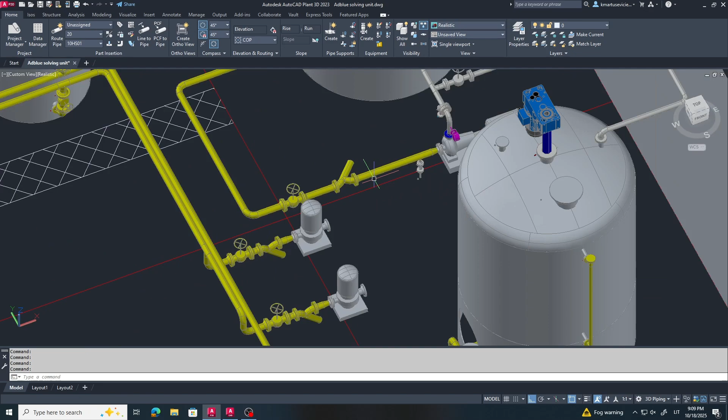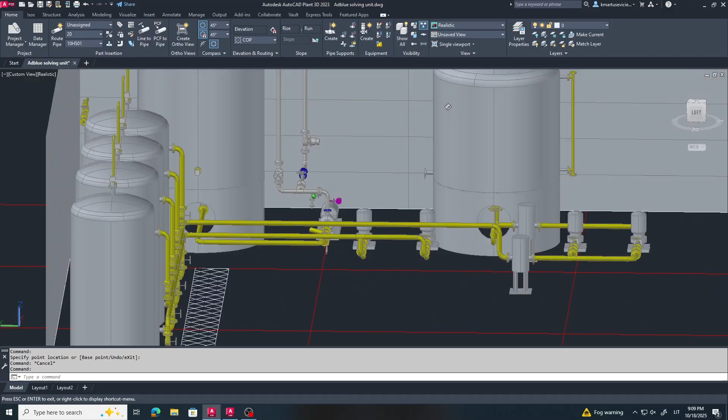In these videos, I walk you through how each part of the installation works, from tanks, pumps, and piping layouts, to instrumentation, safety requirements, and overall process logic. My goal is to make the whole system easy to understand, even if you're not deeply familiar with industrial design. Step by step, we'll build the full model, explain why every component is needed, and show how everything connects in a real production setup. Let's begin.

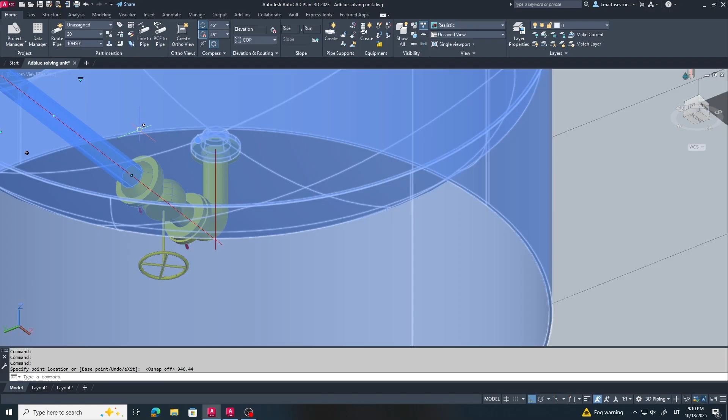Here I'm adjusting the water tank pipeline to create a clear and safe maintenance area. The goal is to organize the lines so technicians have enough space to access valves, instruments, and the tank itself without obstacles.

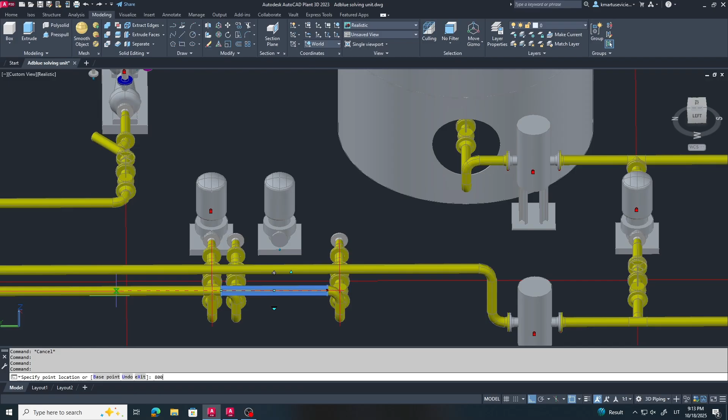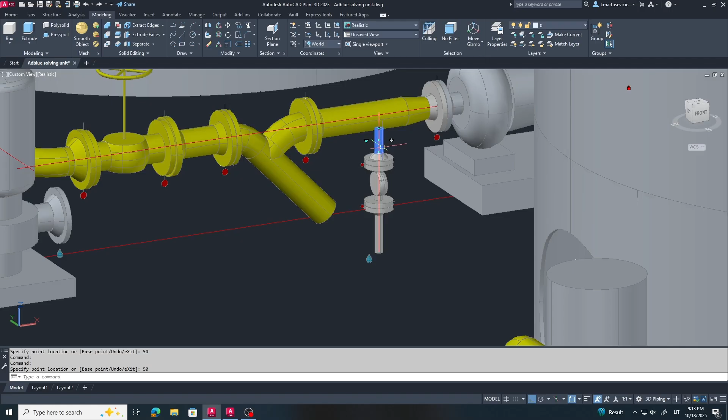Just a small jump to another line. The strainer outlet should be oriented downward, so debris can settle properly in the basket-type filter. Another issue is that the strainer end is positioned too close to the drain valve. The opening at the end may block access, making it difficult to operate the valve. So we need to adjust its position for proper clearance.

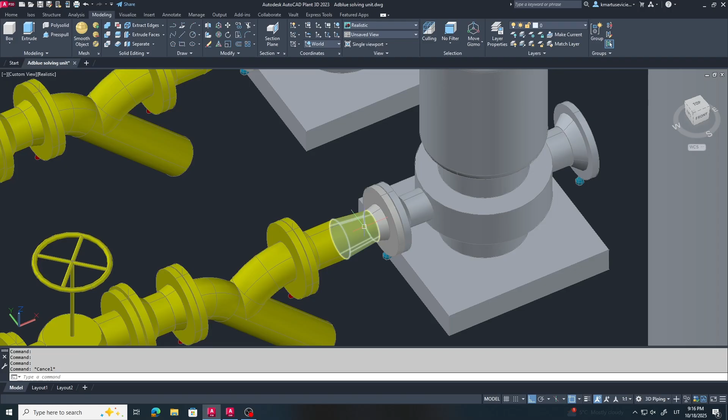I'm shifting the pump slightly backward to create better spacing and improve overall accessibility. Here I'm adding the drainage valves to complete the line and ensure proper emptying during maintenance or shutdown.

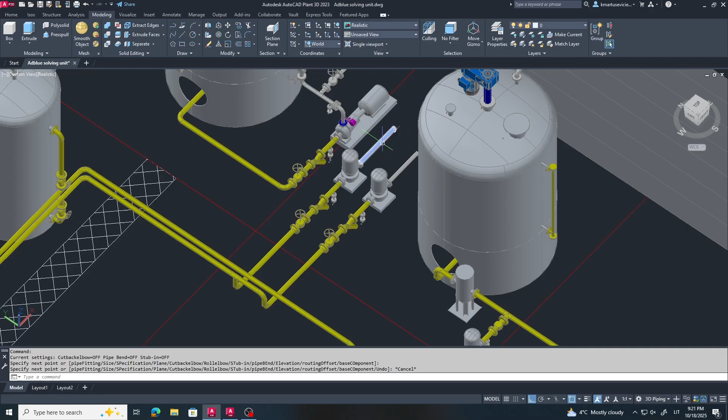Let's finish the discharge lines. One pump feeds the truck loading unit outside, and the other pump fills the storage tank using hoses. Both lines can operate at the same time, so the pumps work independently from each other.

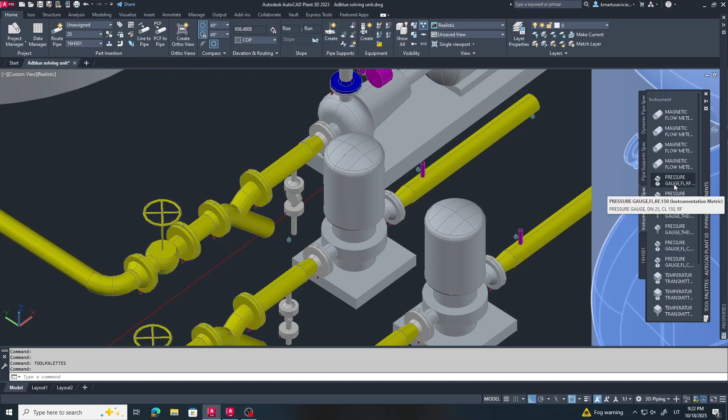Now I'm adding a pressure gauge on the discharge line. This instrument lets us monitor the pump's operating pressure in real time. It helps detect blockages, abnormal resistance in the line, or any pump performance issues. During maintenance or startup, the manometer also shows whether the system is properly primed and running within the safe pressure range.

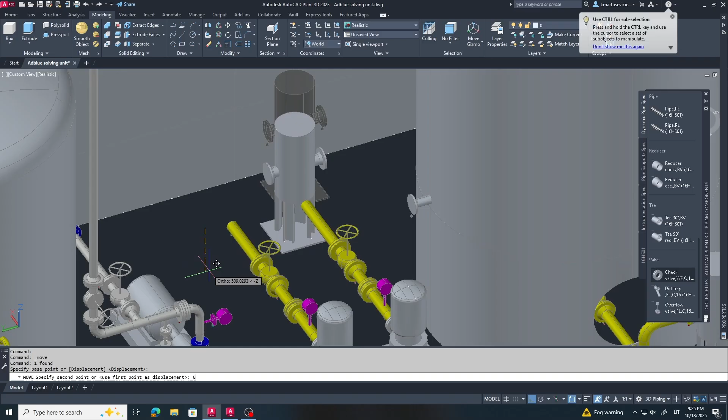The discharge pumps also need basket filters to ensure they deliver clean product to the outside system. These filters trap debris and protect both the pumps and the downstream equipment, keeping the flow consistent and preventing blockages.

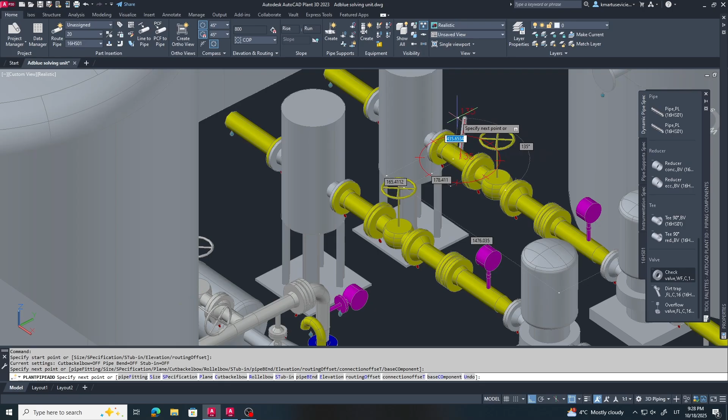Let's add pressure gauges on both sides of the filters. With pressure gauges on both sides of the filter, we can easily see how well it's performing. When the filter begins to clog, the pressure on the inlet side increases because the flow meets more resistance entering the filter. At the same time, the pressure on the outlet side decreases as less product can pass through. The growing difference between these two readings is a clear indication that the filter needs cleaning or replacement.

I connected the filters with a pipe so we can switch the pumps between truck loading and hose filling. This setup gives flexibility. Either pump can serve either line, depending on what operation we need at the moment.

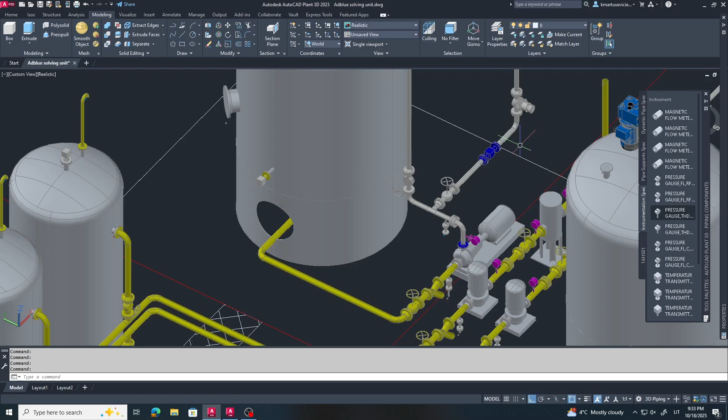Both lines need flow meters, so we can accurately track how much product is being transferred. On the truck loading line, the flow meter shows the exact amount delivered to the truck. On the hose filling line, it helps control and record the volume pumped into the storage tank or containers. Having flow meters on both lines ensures precise dosing, proper documentation, and easier monitoring of the whole system.

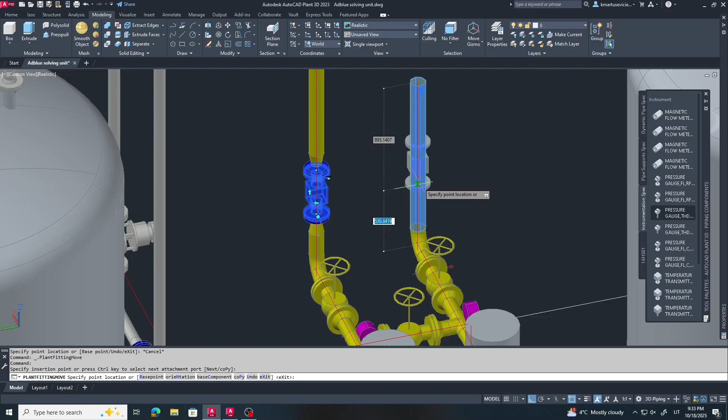Now let's add pressure gauges on this filter to monitor its performance more accurately. The same principle applies here as before. We place pressure gauges on both sides of the filter to see how its condition changes during operation.

This pump is not just a reserve unit. It also has its own dedicated line for pumping AdBlue from the drainage hole, the sump pit. So we just stretch a line from the elbow.

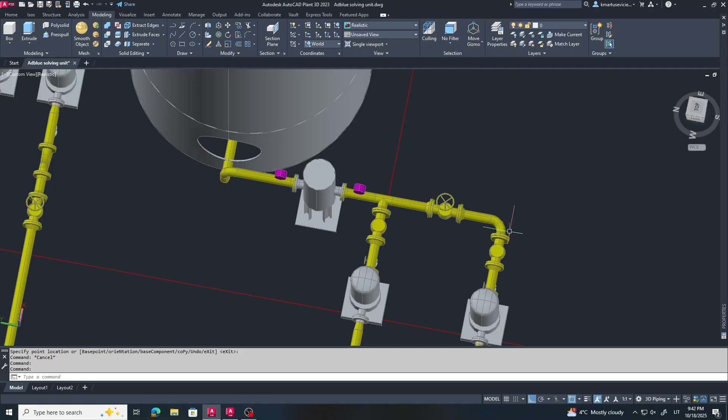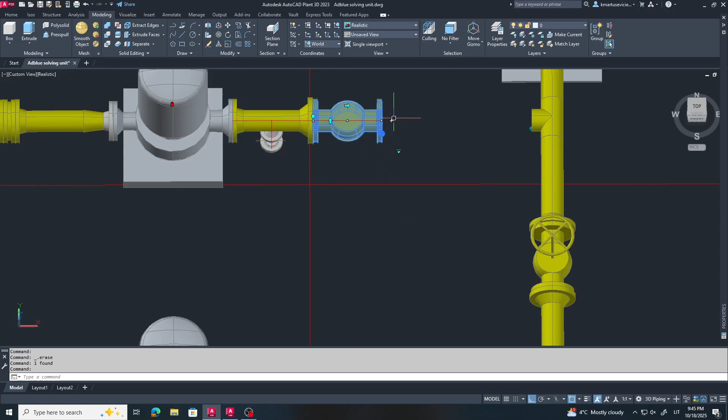I'm just moving this unit to the left side to create free space for the pressure gauges on the suction line. I'm also adding gauges to the pressure lines and secondary filter as well.

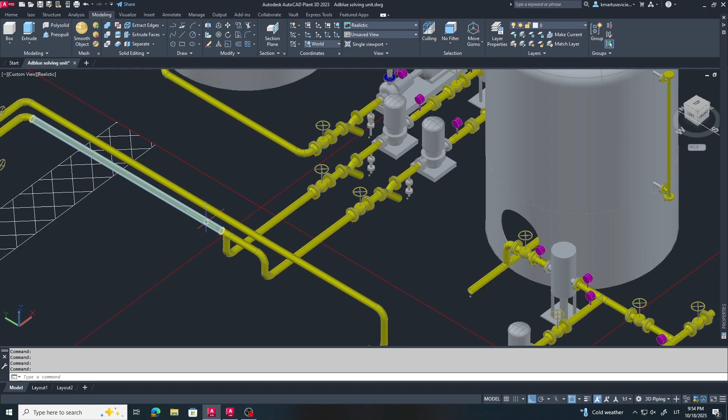I'm simply extending one line from the reactor outlet and connecting it to the discharge pumps. This allows us to take AdBlue directly from the reactor and pump it to the outside as needed. When this option is not needed, we simply shut the valve off.

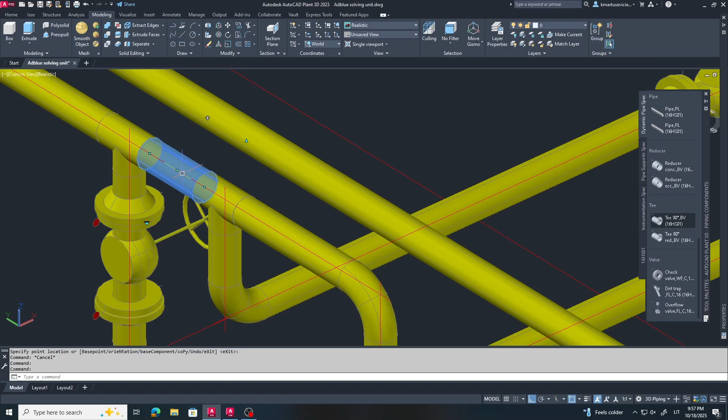I'm adding one more branch on the discharge pump inlet side, with the other end connected to the drainage pit line. This allows us to pump waste from the pit into a plastic container whenever it needs to be emptied.

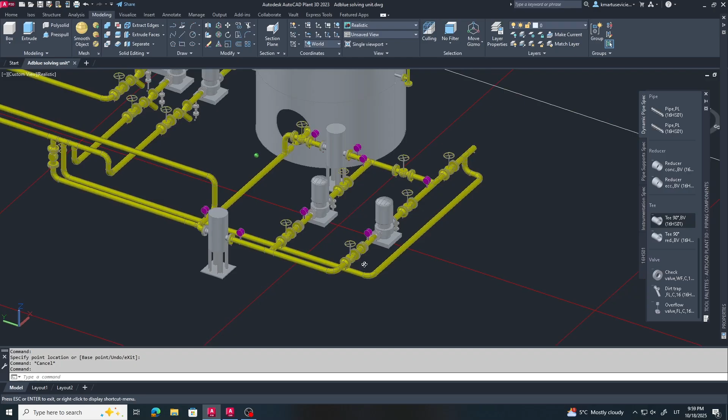This pipe path looks chaotic now, but we'll tidy it up later. This pipe routing looks like a disaster to me right now, but every project has to start somewhere. We improve it step by step until the whole unit becomes clean and efficient. By the end of this project, all pipes and equipment will be in better positions. It just takes observation, adjustments, and sometimes learning from small mistakes.

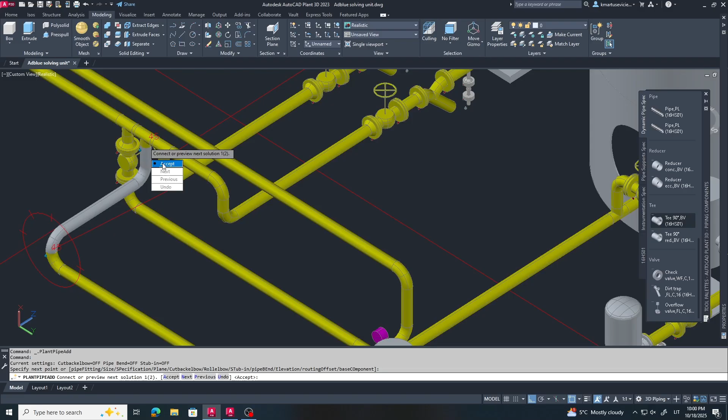It's very hard to complete a project without adjustments. You can place equipment where you think the positions are good, but later you often need to move it because the pipes are too close, access to nozzles is uncomfortable, or maintenance space is missing.

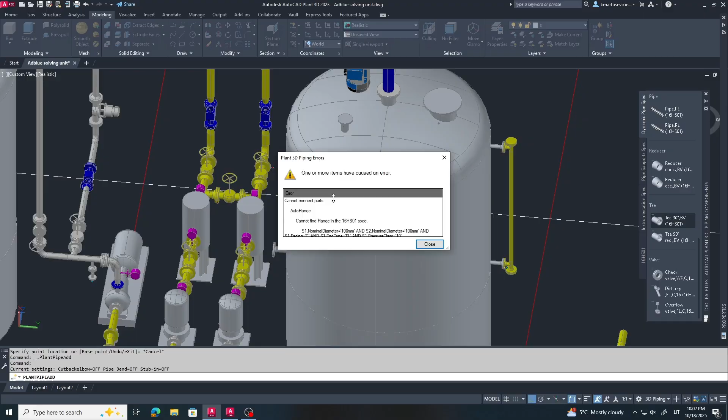I'm adding one more pipe to the top of the reactor. It's used for returning AdBlue for mixing with water or urea, or simply for recirculation.

And that's it for this part. We've added the main lines, arranged the pumps, and connected the reactor with all necessary branches. In the next videos, we'll continue refining the layout, improving pipe routing, and adjusting equipment positions to make the system cleaner and more efficient. Thanks for watching, and see you in the next part.